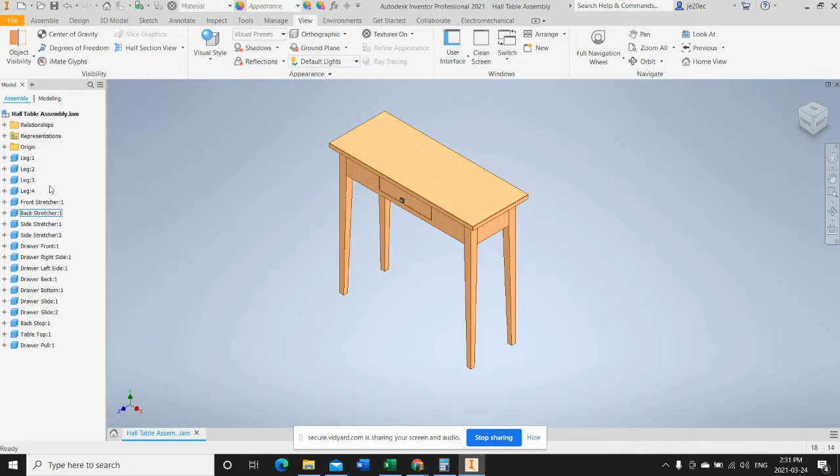So let's get started. We'll click New, and we're going to be working in either, if you're designing in inches, the English subfolder, or if you're working in millimeters, the metric subfolder. In my case, I'm using inches, so I'll select this folder, and my drawing will be this ANSI inches drawing.

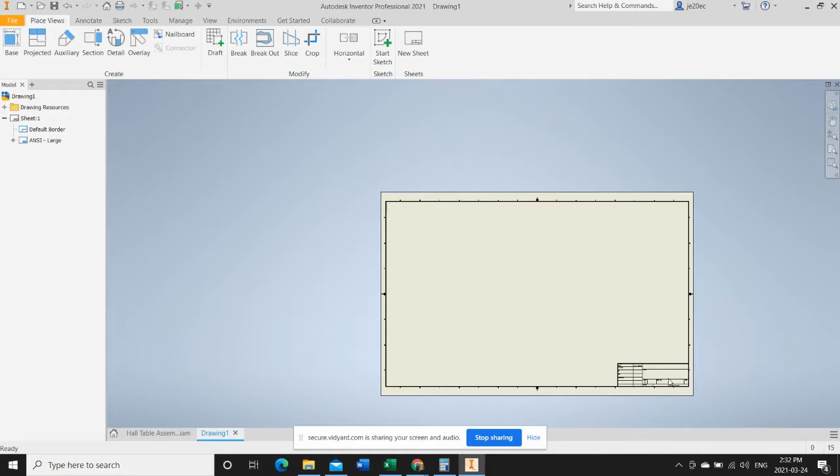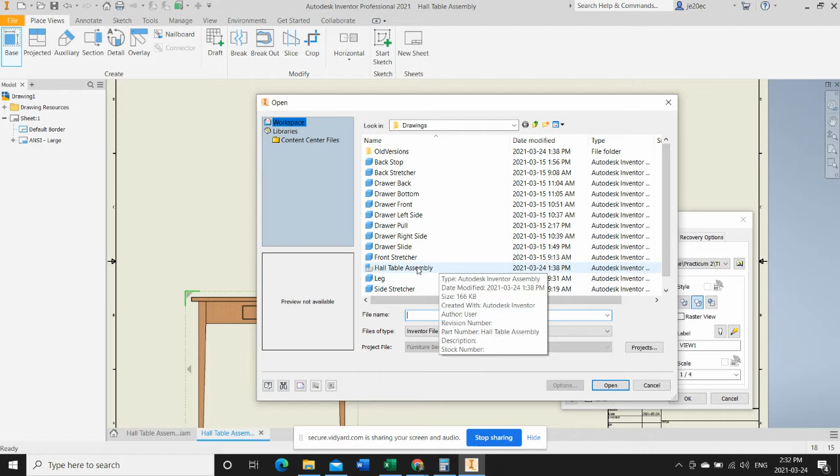So I'll create a new drawing, and it opens up as a D size sheet, which is what I want - that's the appropriate size piece of paper for my hall table assembly. To get started, I can click here on the base. If it brought up a model that I hadn't intended, I could use this browser explorer to select the appropriate 3D assembly model. In my case it did come up correctly, but we'll go through the process of selecting it, so we click open.

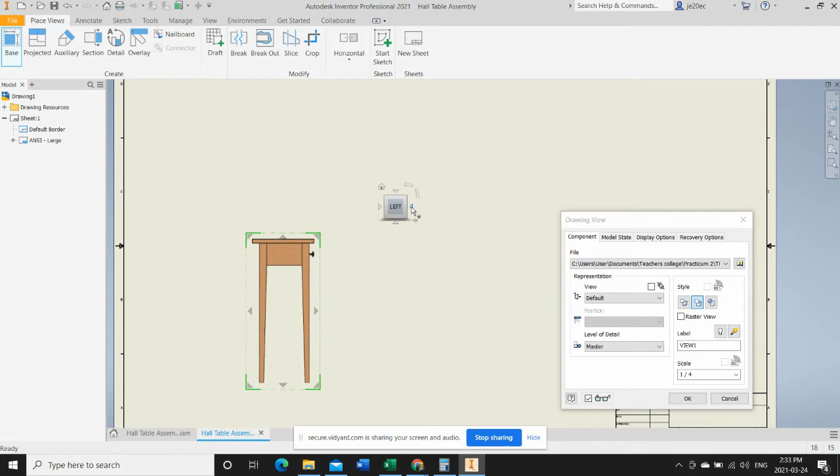The front view is the view that I want to use. If I wanted a different view, I could rotate the view cube to get different arrangements, but in our case we want the front view, so we'll go with that. The scale is also good. I want to fit 3 orthographic views on this drawing, as well as a section view and an isometric view. So we'll start with 1/4 inch.

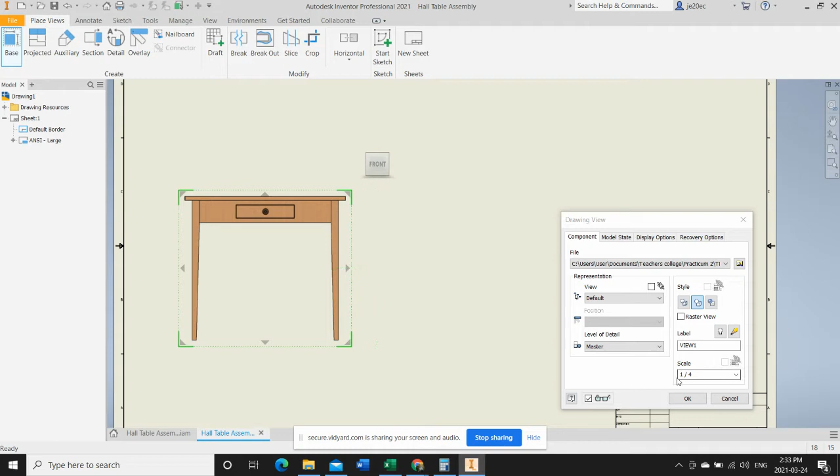I'm going to project a right-hand view and an isometric view, and that's what I need for this drawing at this point. My isometric view I need to make smaller, so I'm going to go one scale unit down - I'll try 3/16.

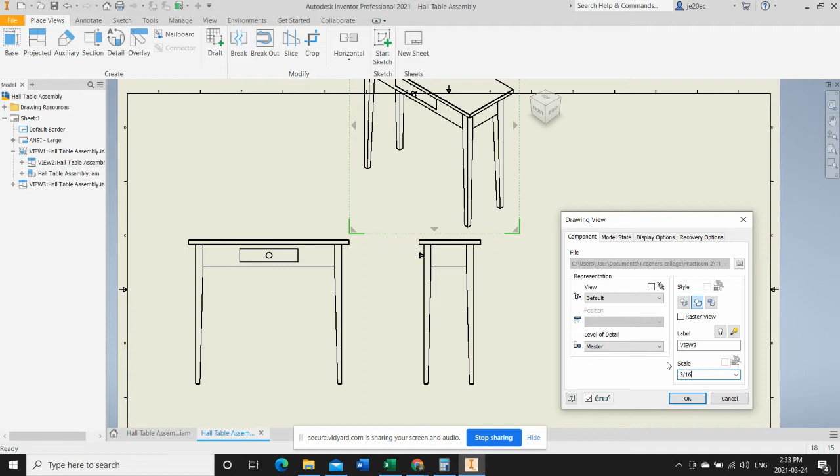Pull that onto the sheet of paper. We will move down our base view, which brings the other view with it. See if that gives us enough room.

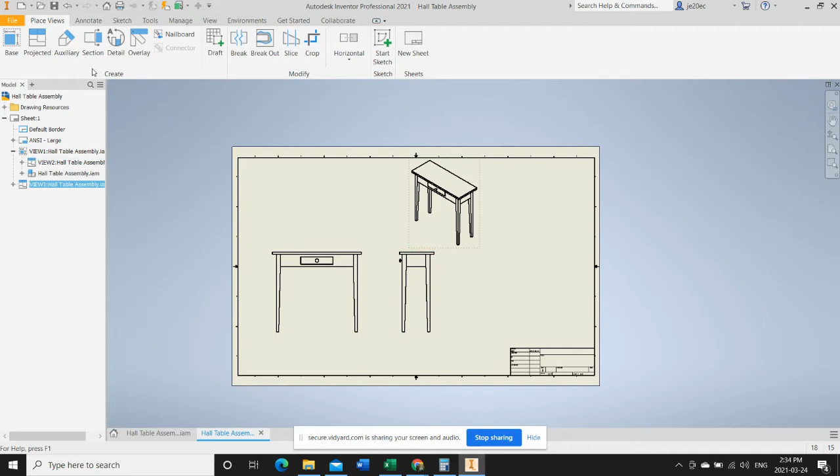Now I want to actually project a back view of my table. The way I can do that is I can use this projected function, and we'll select the correct view first and try that again. We'll pull it over to the right - you can see we've got a back view. I have to right click and click create to get that view to come up. But basically through a couple clicks of my mouse, I've created all the views I'm going to need for my drawing, with the exception of one.

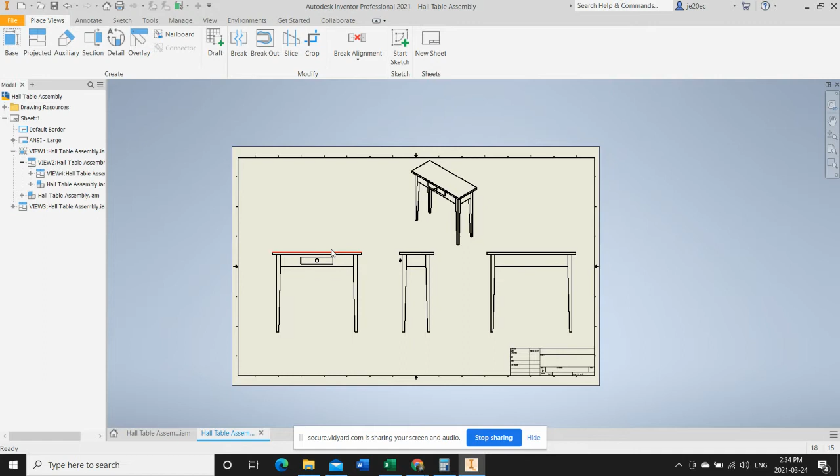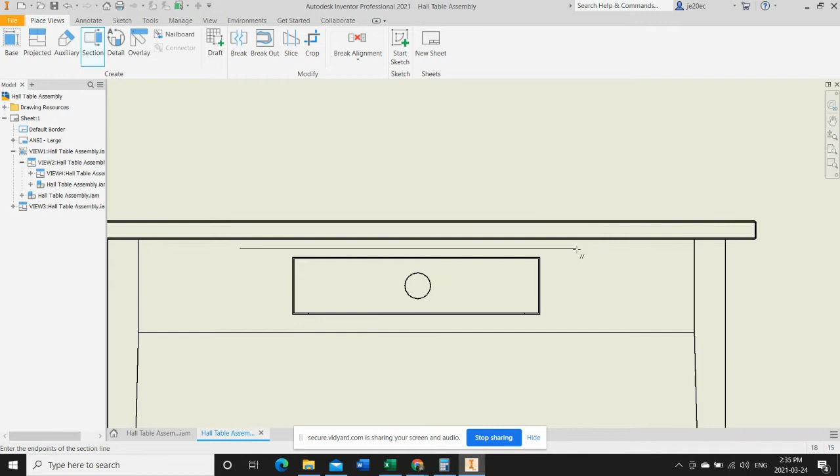My table has this drawer in it, and because the drawer's in the closed position, I can't necessarily see any of the parts that make up the drawer, but I know they're there. The way I'm going to show that in my drawing is I'm going to add a section line. So I've clicked the section icon, and now it's prompting me to pick a view, which I've done. Now I'll enter the endpoints of my section line. I'm going to right click and press continue, and now I have my view that I can pull away from my object.

I like this placement, so I'm going to click to locate it there. Now you can see the section line indicated by A. It's looking down on this shelf as if it cut away the top of this table, and you can see that reflected here.

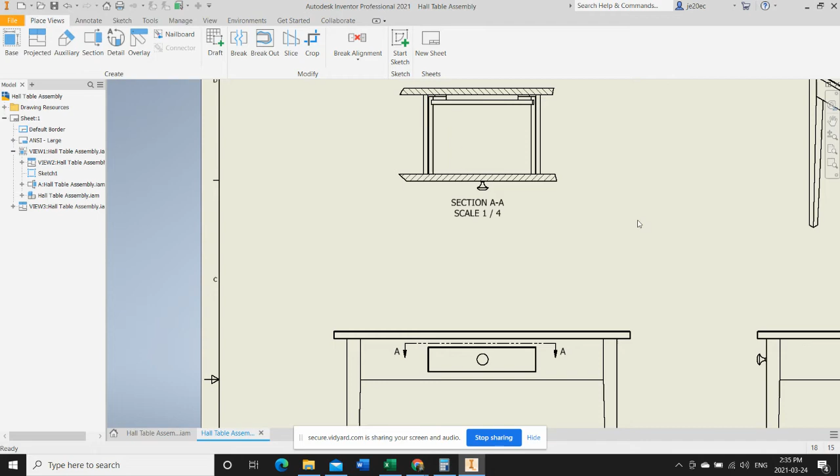The next thing we need to do with this drawing is we need to add a bill of materials. To do that, we can go to the Annotate toolbar, and we'll select this icon called Parts List. Again, for purposes of this activity, parts list and bill of materials are synonymous.

We need to select for our bill of materials an assembly model, so that's going to be our hall table. Again, we click the browser icon, click the hall table assembly, and click open. There's different BOM views - you have structured, parts only, structured legacy, and parts only legacy. We will use structured, but we'll be modifying this.

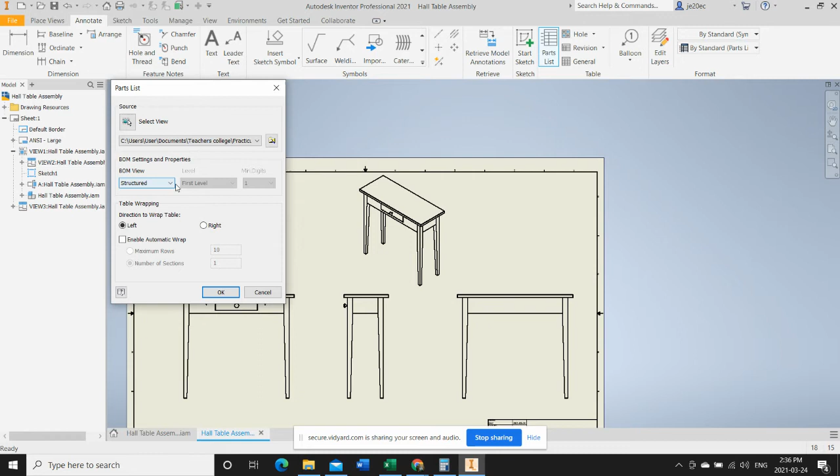Okay, so structured, click OK, and place the bill of materials or parts list in your top right corner, and click to locate it. What you can see automatically happened is it's associated from the assembly file the different parts that go into the assembly, and they're all listed here, as well as the quantity of each part.

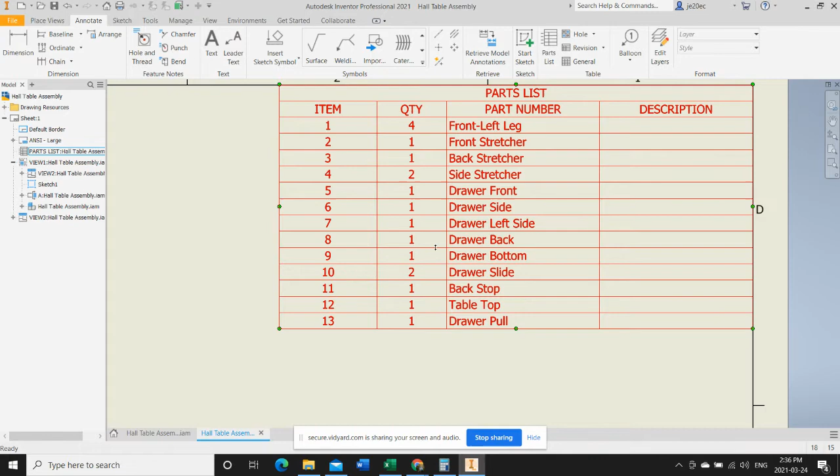So there are 4 legs on this table, 2 side stretchers, 2 drawer slides, and everything else is a one-off unique item. What we're going to modify on this table is we want to have a column on the right that shows the material each part is made out of.

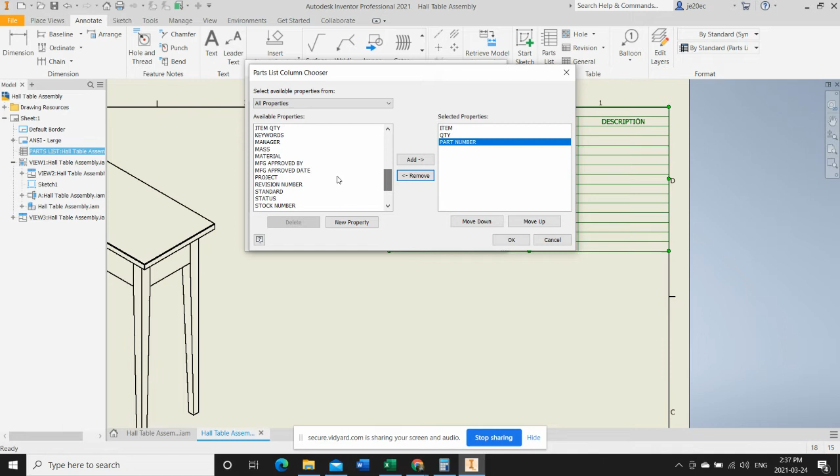To do that, we'll double left click and select this button here, which is column chooser. If I click that, I can remove the description column and add in a materials column. Click OK.

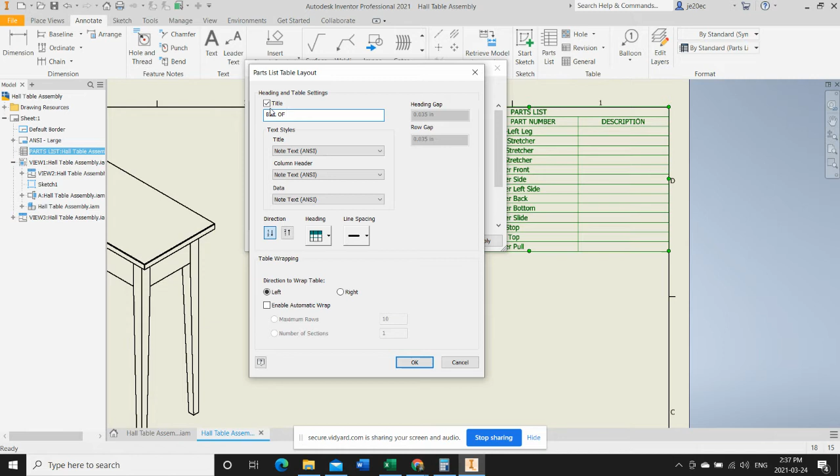I also want to show you how to change the title. If you want to use bill of materials like I do, instead of parts list, you could do that here. This was the parts list table layout icon. Click OK. Again, it was this icon here that we were just in, the table layout.

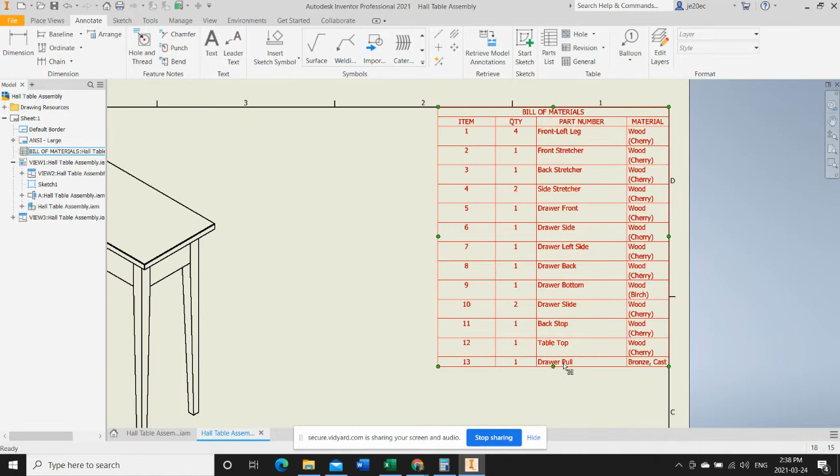I'd like to expand this column just to fit everything on one line, and that's simply done by hovering over the line and then dragging it. Now I need to associate the item number for each part in my table with the drawing.

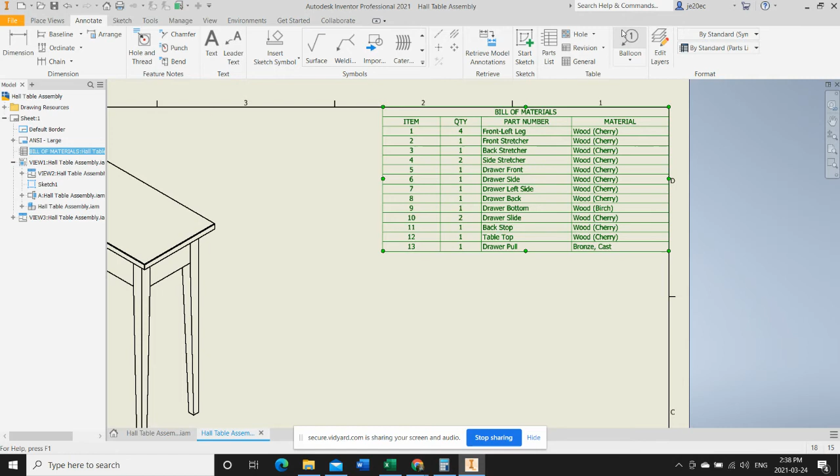To do that, we'll be using this balloon tool. So these are balloon leaders, and they will basically have a number that corresponds to this item number.

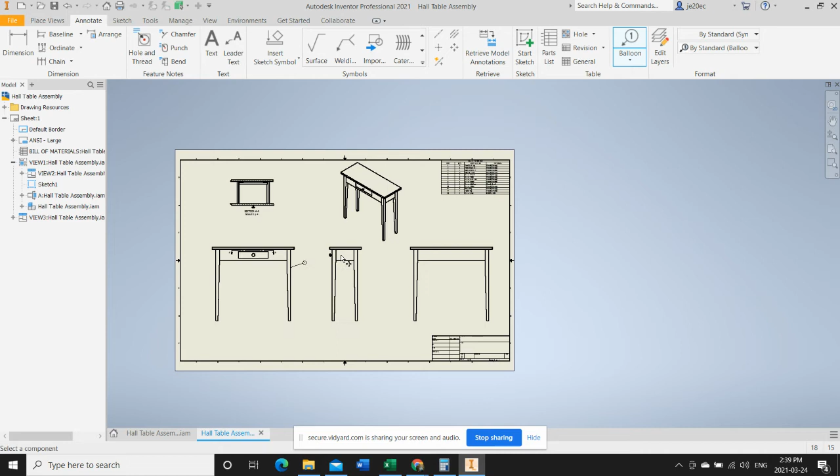Our first item in the list is the leg, and we'll just do a balloon leader to the leg. Click once. It lets you do different segments on this leader, but I don't want those, so I'll just right click and click continue. If I zoom in, you can see number 1, the item number, is now associated with the leg on my table.

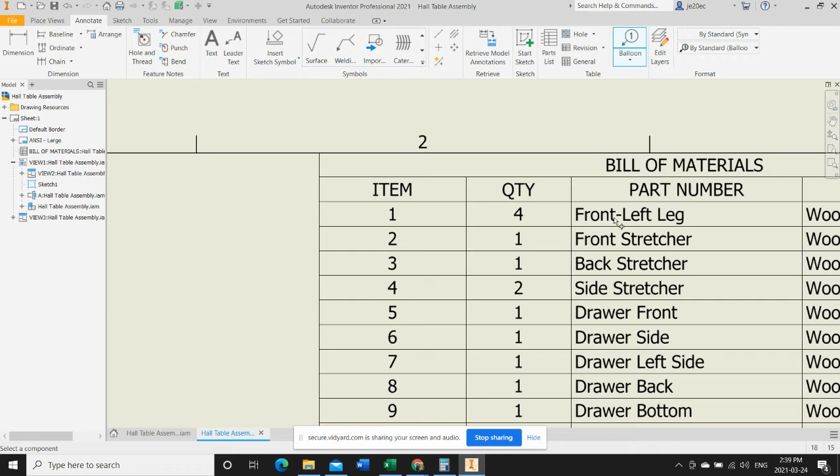Right here, the description is a little misleading. I'd like to edit this, so I'll double click here and click into the field and just call it leg, with my caps lock on, so I'll turn that off. Call this leg. Another edit I'd like to make is call this drawer right side. You can see down below there's a left side, so now I'll have a drawer right side and a drawer left side. We can just apply and click OK.

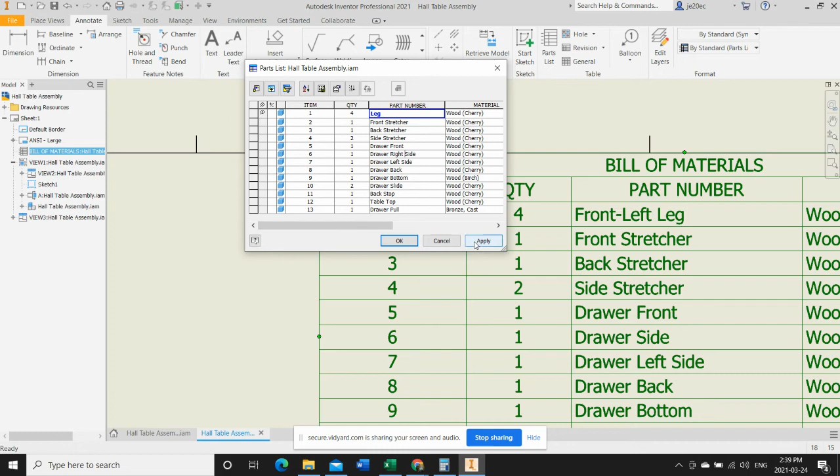My table has 4 legs, now they make sense. I don't need to differentiate which is the front left. Each one is actually constructed the same, so item number 1 is taken care of.

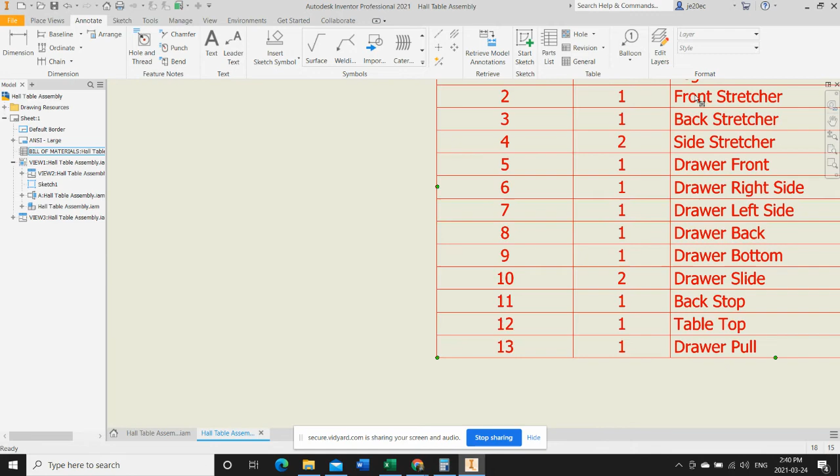Now we'll do item number 2, which is the front stretcher. There's one of those, and we'll use the balloon leader tool, hovering over the number 1 to place this leader in line with that. Right click and continue. If I zoom in, you can see front stretcher is here and the leg is here. The leg is number 1 and the front stretcher is number 2.

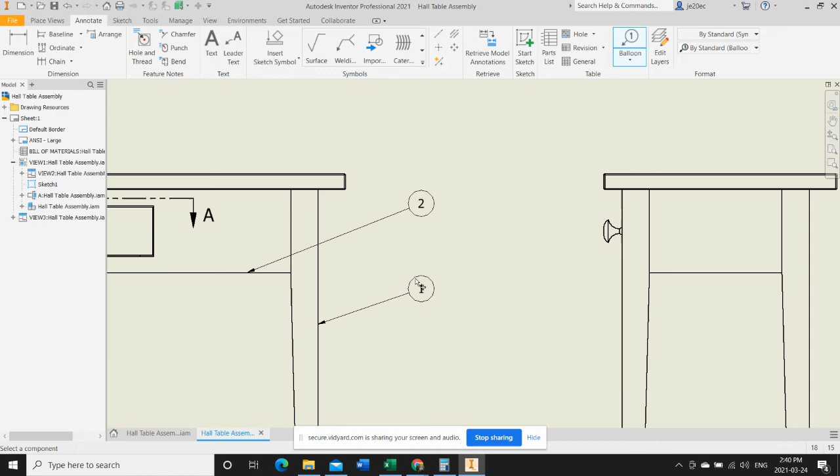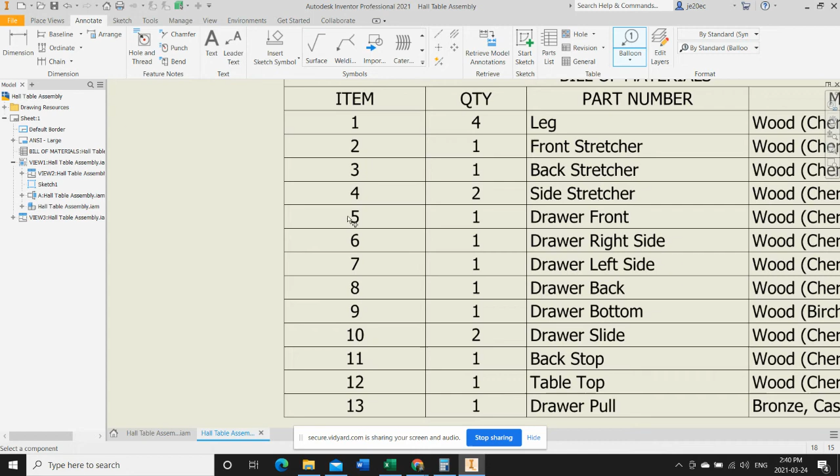I'll just work my way through the list and do item number 3, 4, 5, 6. Number 3 is the back stretcher, which is here. I can click on that, pull the leader out, right click continue, go to number 4, side stretcher, which would be here.

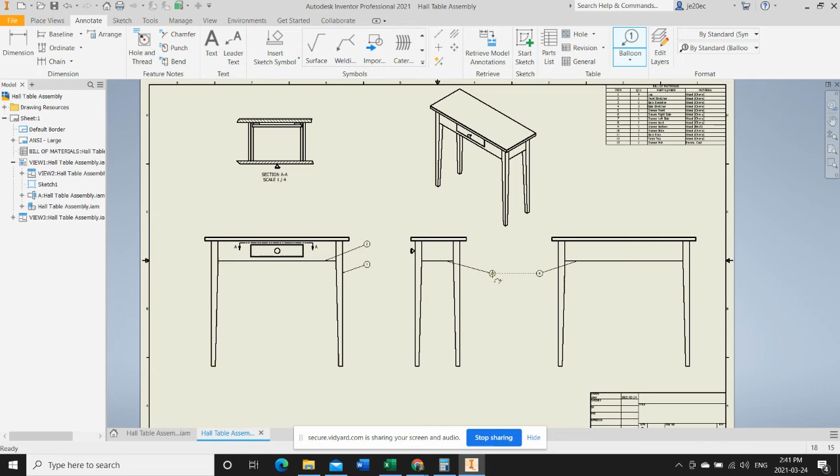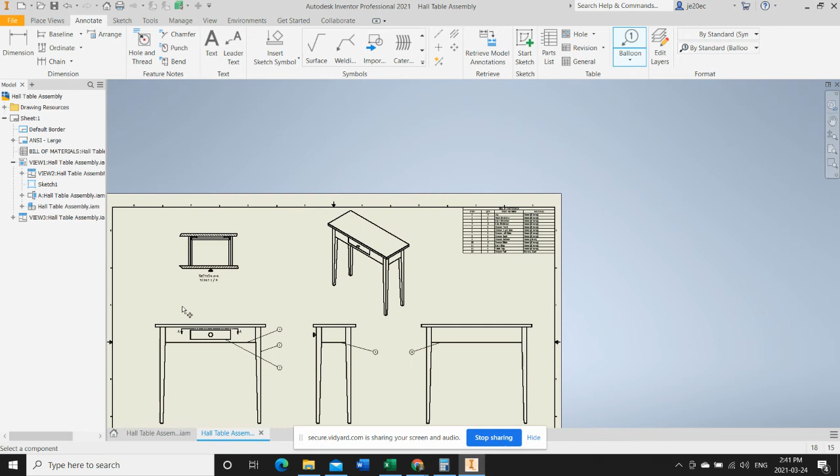Number 5 is my drawer front, should be here. Our drawer right side is in our section view - that's why the section view was important, we never see this part without a section view. This is the right side of my drawer. Drawer left side is over here, and again we'll pull a leader out to indicate that.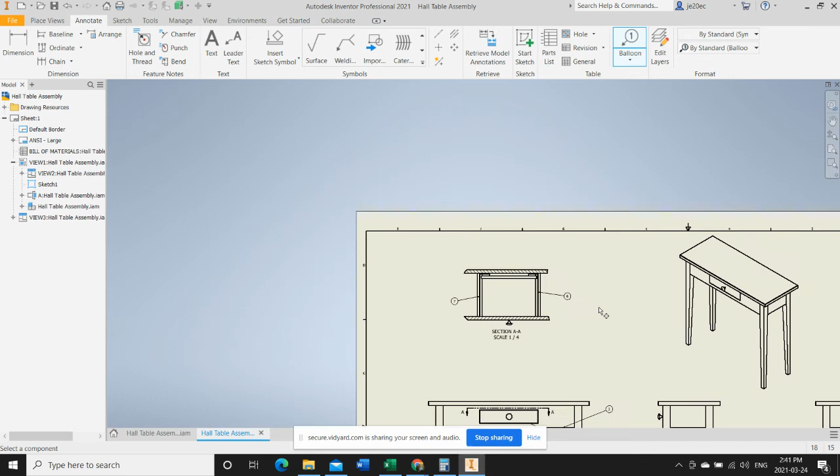Okay, so I would continue working through the list doing number 7, 8, 9, 10, 11, 12, and 13, and this drawing would be done. The last thing it will need is some overall dimensions, which we could do now.

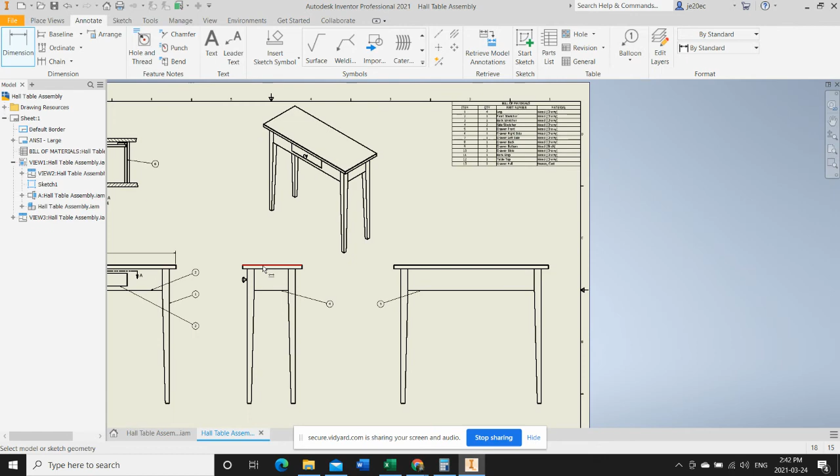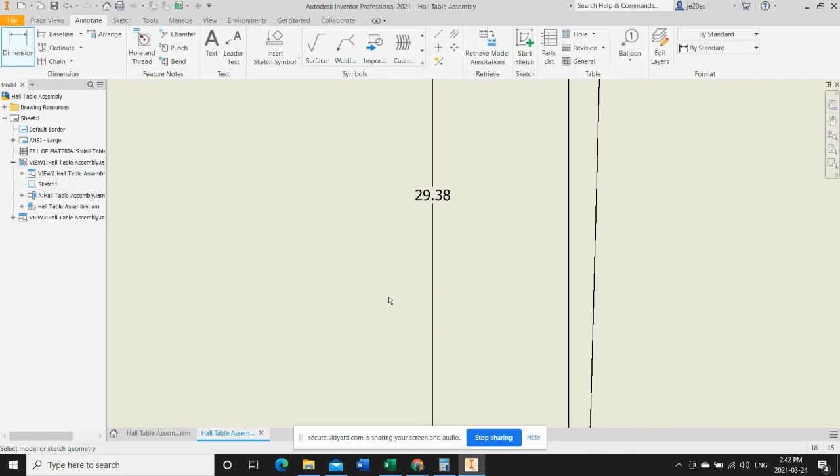Overall, the tabletop is 32.88. The width, 12.63. And the height is 29.38. These were designed as fractions, so I'm going to go to the styles editor so I can make those dimensions make a little bit more sense.

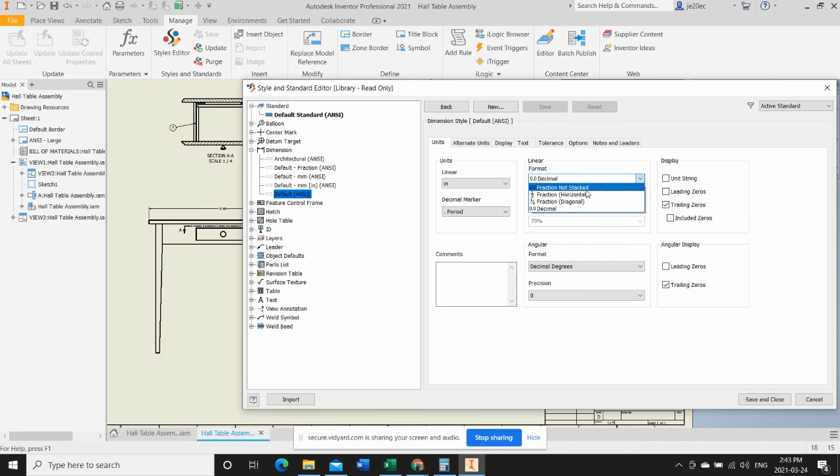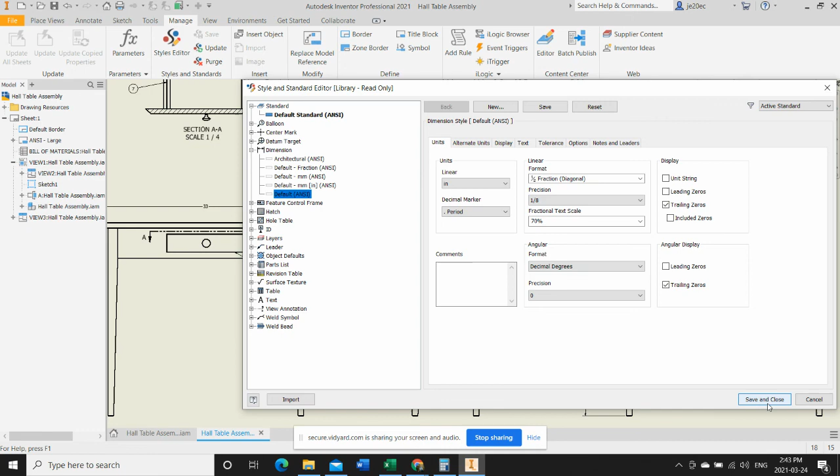Now you can see I have the fractional measurements, but the precision is off, so let's see if we can adjust that. I'll go to 1/8 of an inch precision, save and close. Now this looks right to me: 12 and 5/8, 32 and 7/8, and 29 and 3/8.

So now it'd be simply a matter of saving the drawing and continuing on with the rest of the project. Hope you enjoyed the video. Thanks for watching.